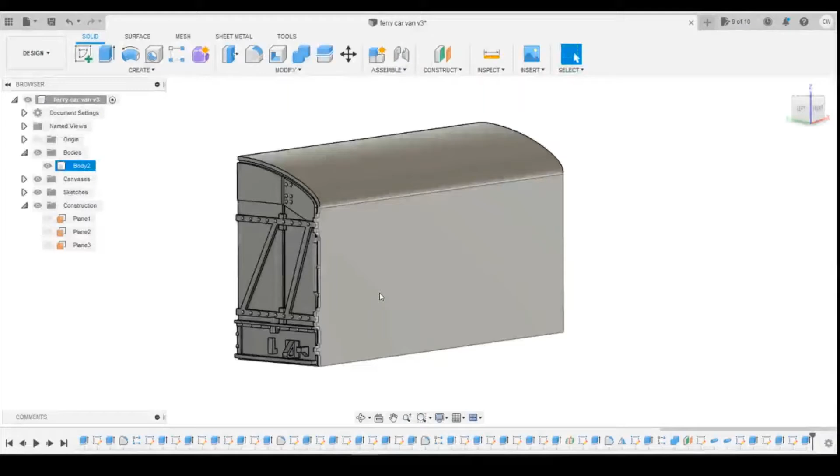Okay, so the first thing we're going to look at is if we get the canvas back onto the side, and we're going to continue the hinge round the corner here, so you can see it's all in line, comes around here, top and bottom. Doesn't really look like there's any rivets on these. I'll try and see if I've got any pictures that are more close up. Yeah, it doesn't look like there's any rivets or anything, they're potentially just welded on. Well, it's just like a strap, so it should be nice and easy here.

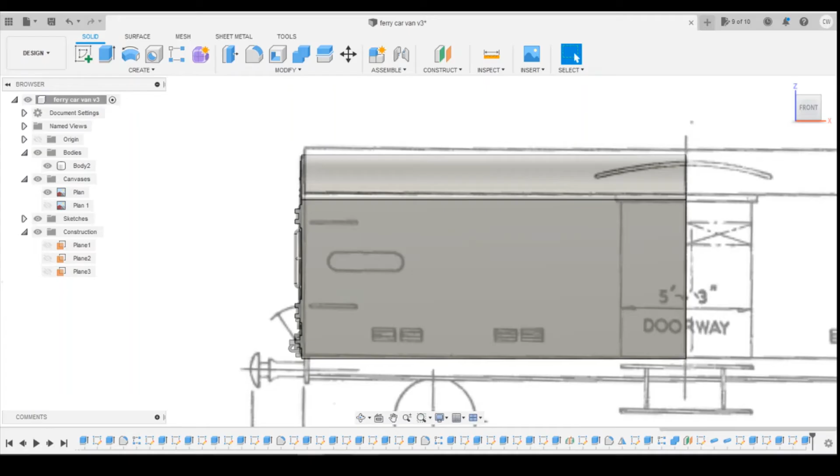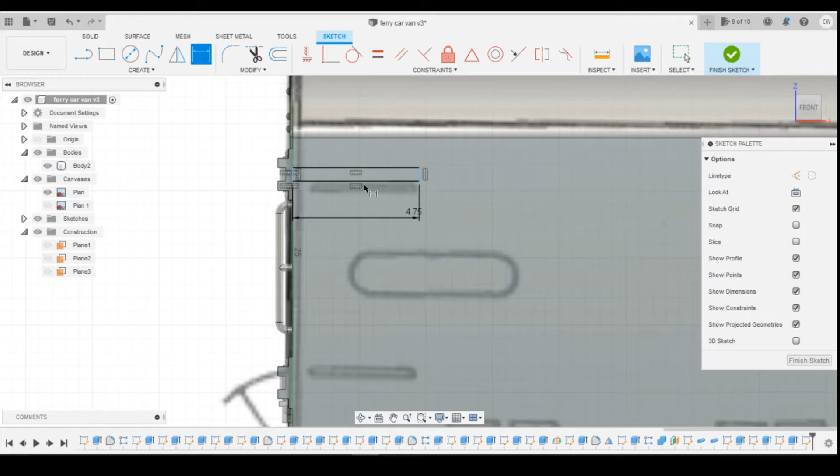So create a rectangle, I'm going to do it on the side face here, and it comes from the end of the wagon, so just doing a rectangle, find it in line with the base there, and I'm just going to drag it across like that. Okay, dimension wise it's going to be 0. Actually, if I don't dimension that, if I delete that, we use the constraint, so we'll use horizontally vertically constrain that to the same point in the hinge and the same on that one there. Lengthwise, I'll go for 4.75, it sort of matches the drawing a little bit, and horizontally constrain that corner to that edge there.

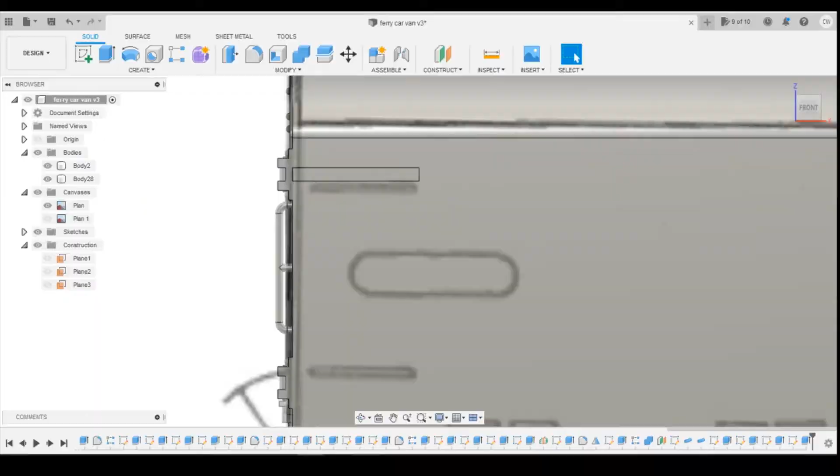Okay, so now we'll just extrude this forward slightly. I don't think it needs much, maybe 0.15, it's just giving a bit of relief and profile there. And looking at the pictures, it's quite close and fitted towards the body, so I don't need to come up particularly far. Okay, let's mirror that feature downwards. So select the feature, and the direction comes down. So it's going to be 7.75, which is what we were doing earlier for all the rest of them, and then we need 2 of them. Okay, so that's completed.

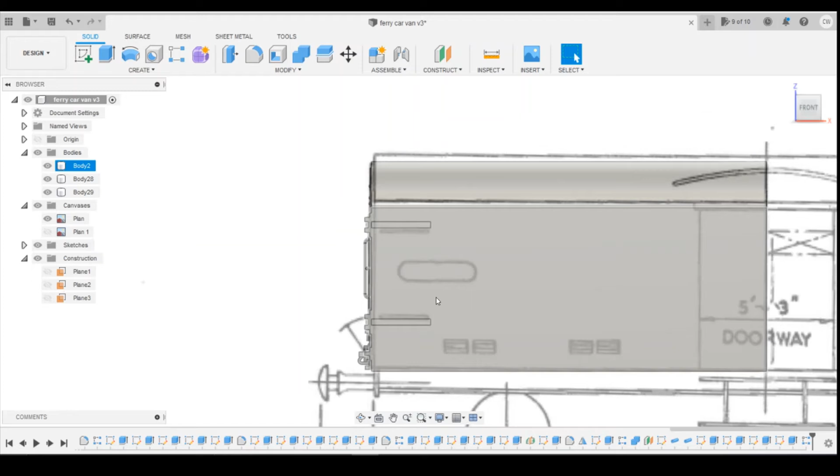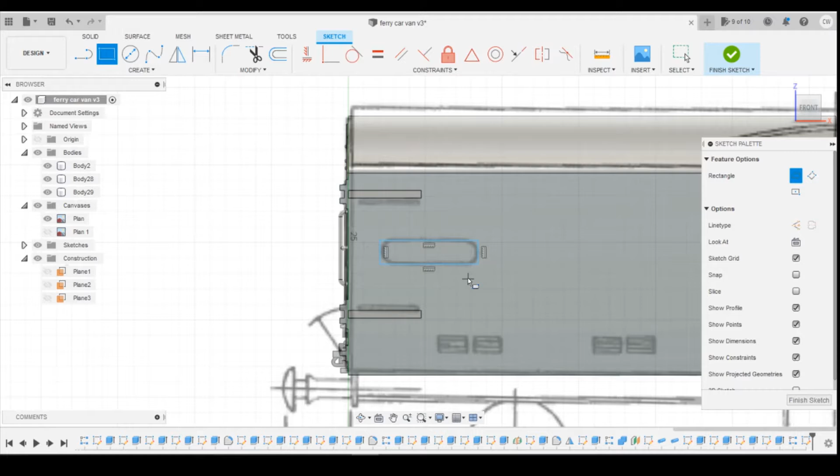Okay, so the next thing we'll draw is the chalkboard here on the side. Again, coming to Fusion, you can see that its position is actually on the plan. It actually looks pretty close to where it should be, so I'm going to go with what's here. So we'll create a sketch on the side profile here, just using a rectangle. Drag out to the correct size. Height-wise, let's dimension that. Actually, let's go dimension between the 2 sides. So we'll go for 1.5 millimeters.

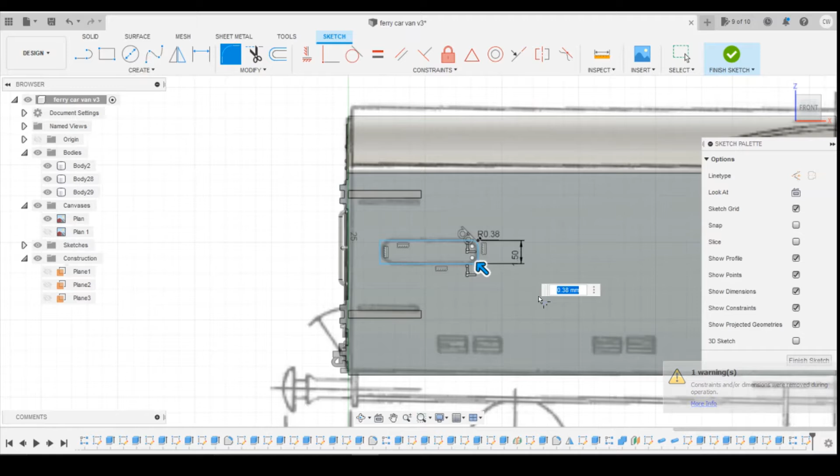And looking at the picture, some of them are rounded off, some of them look like they've just had the corners cut off. I think I'm just going to go rounded because I think it looks neater, and obviously once you print it, it's not going to be particularly big anyhow. So that should be 0.75, I think. We'll round that completely. Yep. And we'll do the same on offset. We'll do the fillet on the other corners here. And 0.75. Let's round it up.

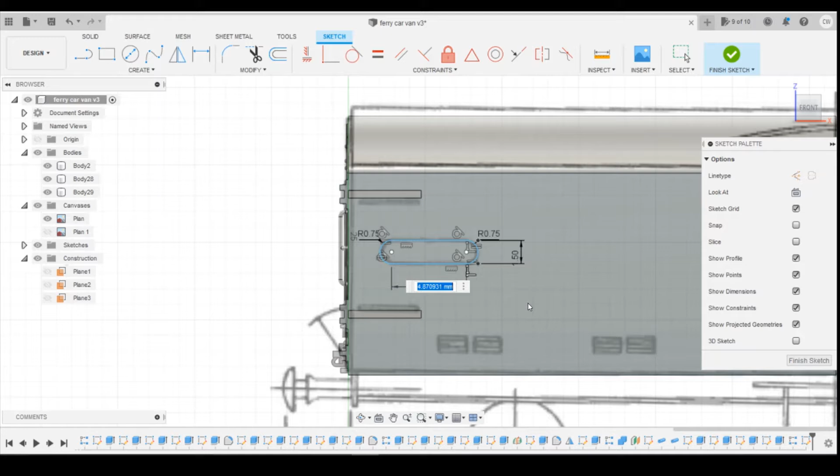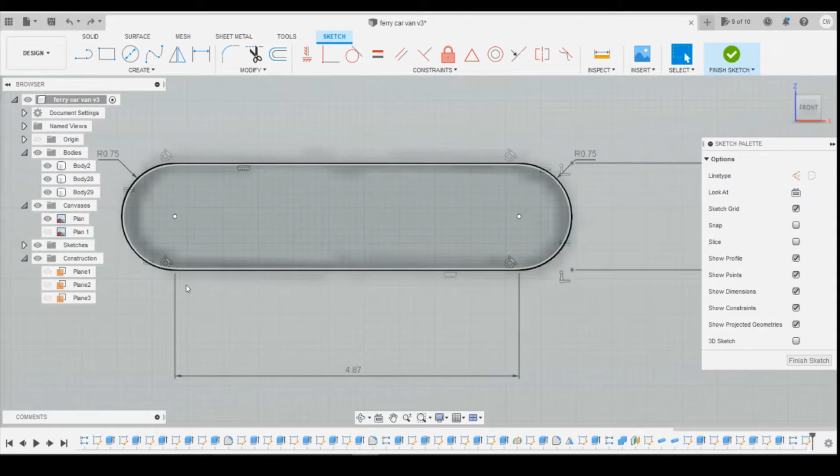Let's dimension the length. 4.9. It's getting a little skew there for some reason. Undo that. Undo that dimension. Yeah, for some reason that's skewed up the corner. So we'll just go with whatever its length is when you define it. It seems to still be circular enough for me. Let's dimension the height. 1.5 millimeters there. And the distance from the end, 2.1.

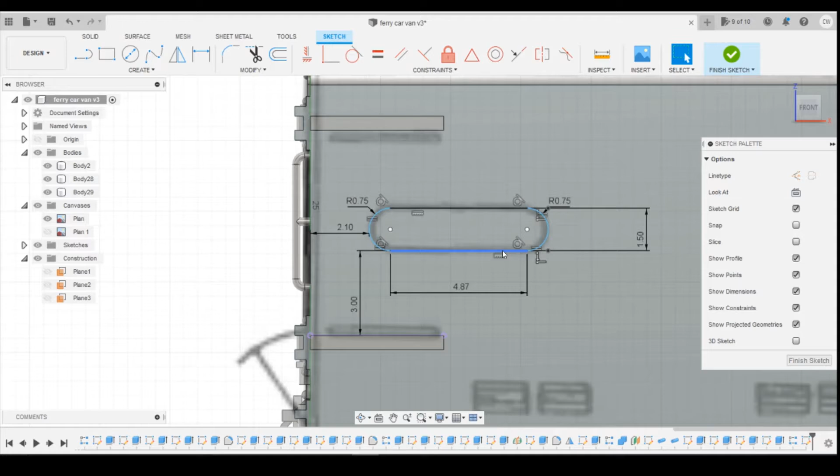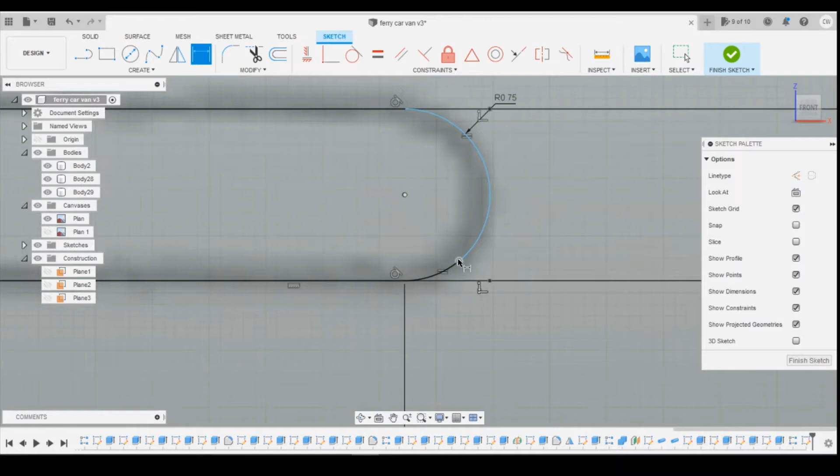Okay, let's take that dimension off there and dimension between the 2 sides there. Not sure why that radius isn't dimensioned, because it should be. There. Yeah, okay. There. Yeah, I don't know why these aren't dimensioning. There's a little step on it for some reason. Okay, not to worry. What we'll do is we'll leave it as it is.

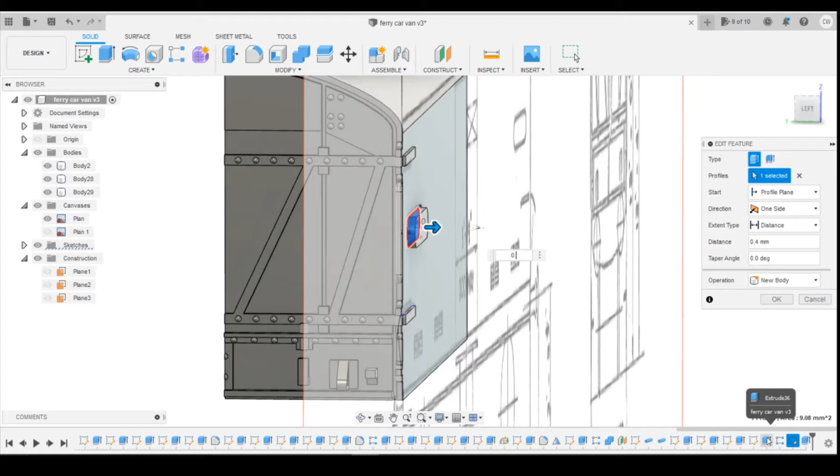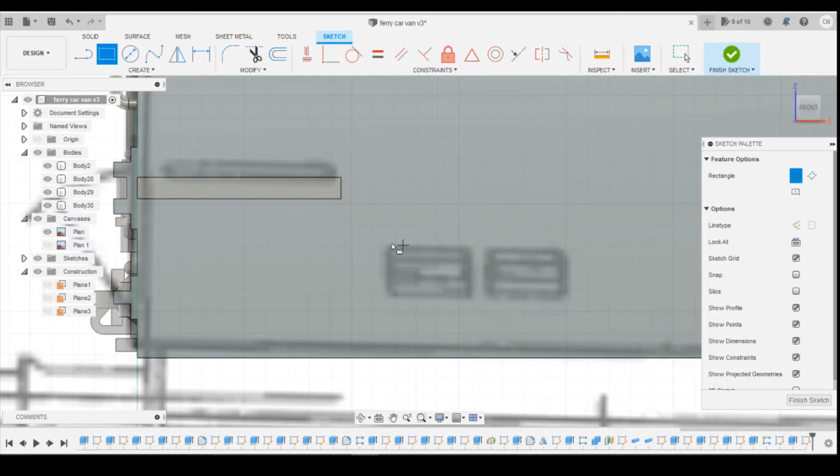Okay, so the next one I'm going to add in are these little vents on the side here. I'm just going to do representations of them really. Creating a sketch on the side. Just going to do small rectangles like that. Define the length. That's going to be 1.9. And the thickness of them, 0.2. Extrude that into the body, so that's minus 0.2, so it's going to cut in.

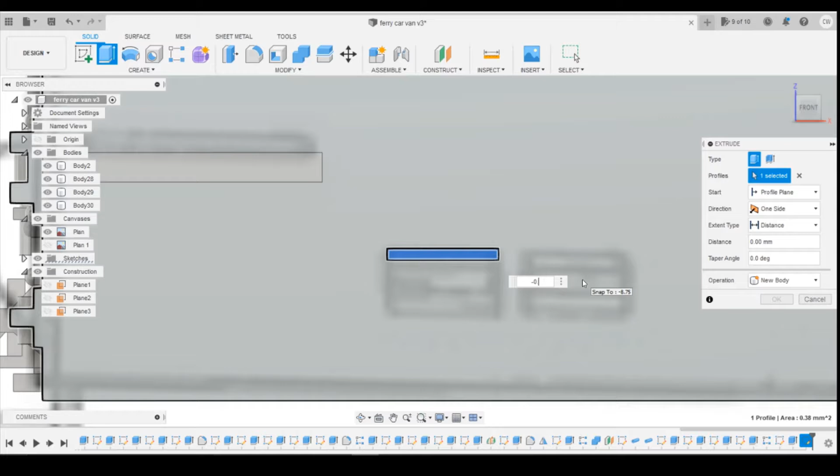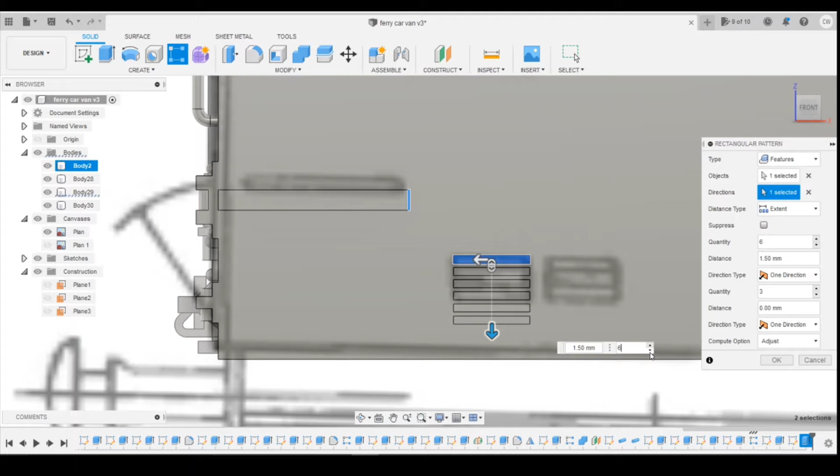So the vents, there's 1, 2, 3, 4, 5, 6 of them. Now we could try doing 6 of them, but I think that might be too many for it to spread out. Yeah, if you do 6 of them, it just fills the whole thing in. You could go maybe a little bit longer. Then you would get 6 in, but then they look massively too long. So I'm thinking maybe go for 4 and then spread them apart by 1 millimeter. Again, who's going to be counting these sort of things?

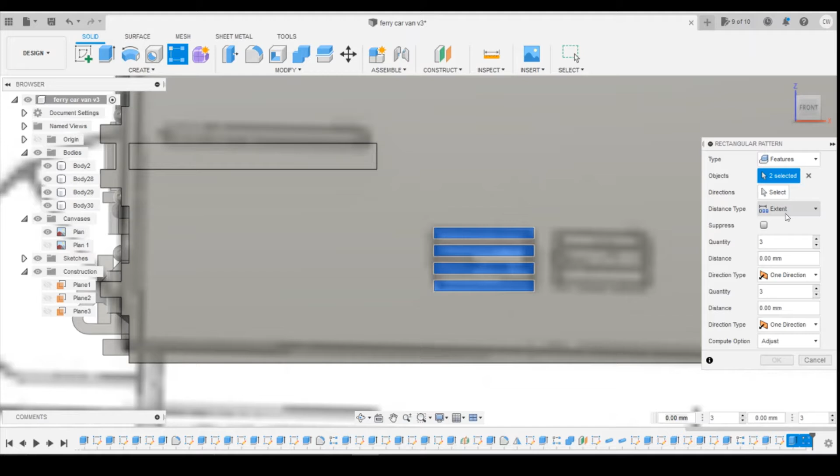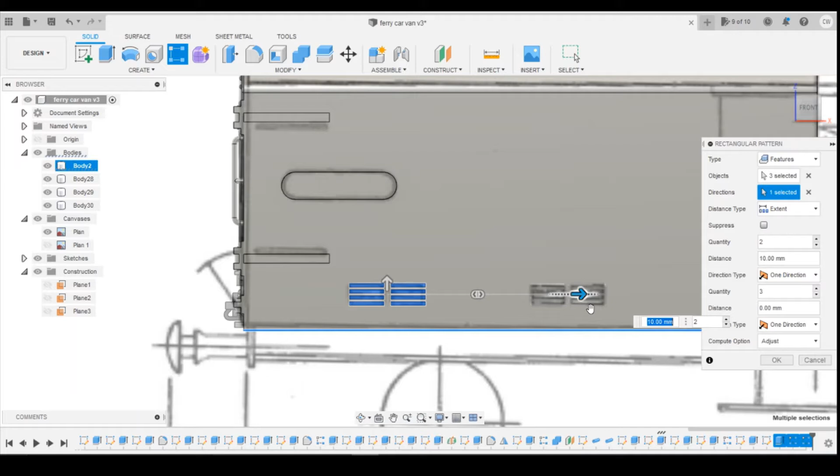So we're going to pattern these. So we'll pattern that feature and the pattern of them downwards, and then direction wise pattern across. Need 2 of them. Okay, we'll do that like that, and then we'll pattern all of that lot again, and direction across again. Need 2 of them. Try and get them as close lined up on these as possible. 10 millimeters come across okay.

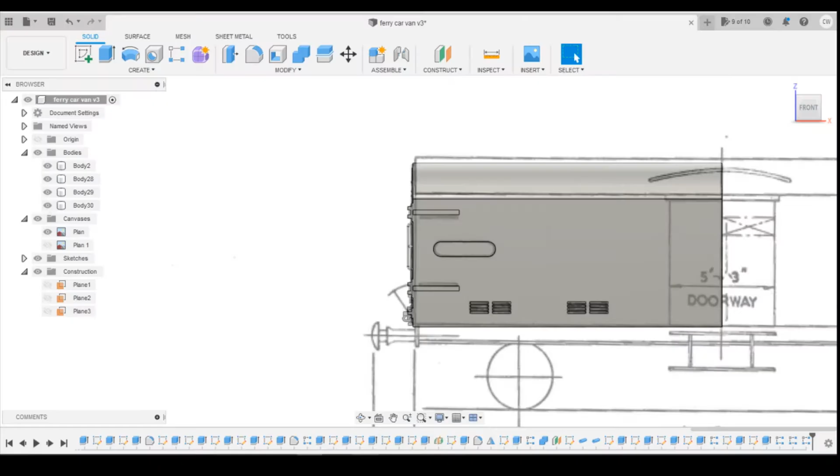Okay, the next thing I'm looking at is there's a strip coming along here, which looks like the roof just comes down. It's got like a panel in that's attached to the top. It's not a rain strip. It's just one over the doorway. So I'm going to add this onto the side here.

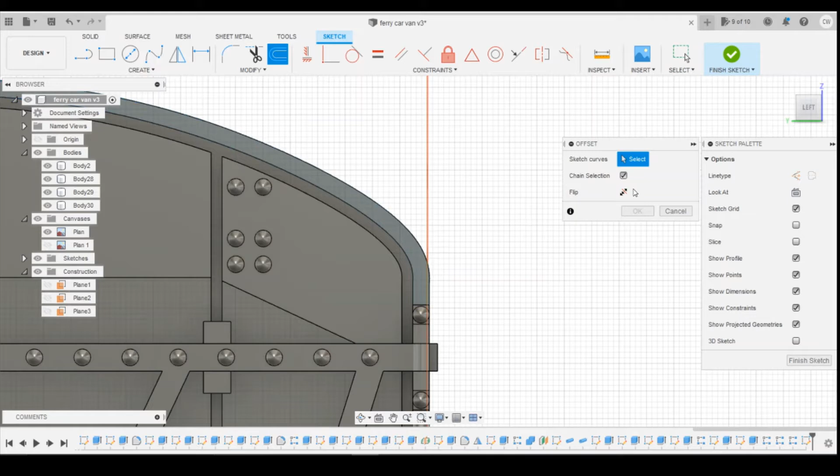If we create a sketch on the side profile, and we come down, so we should be able to just use offset, turn off chain selection, select the profile over the roof and down to the top of the hinge here, and bring that down to say 0.1, and then we can just close that in there and close that.

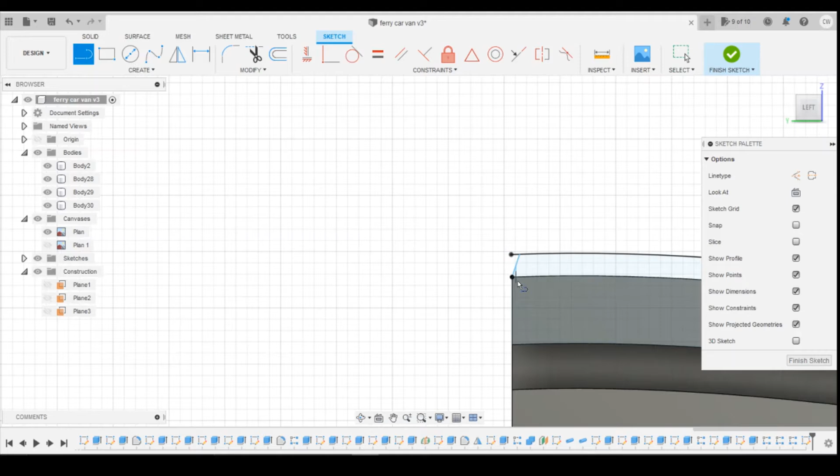We'll have to come up from the doorway here, put that down from the top, so go up. Okay, I'm going to snap that to an angle, and then we're going to do horizontal, vertical, constrain that, so that it's going up vertically rather than trying to snap to the end.

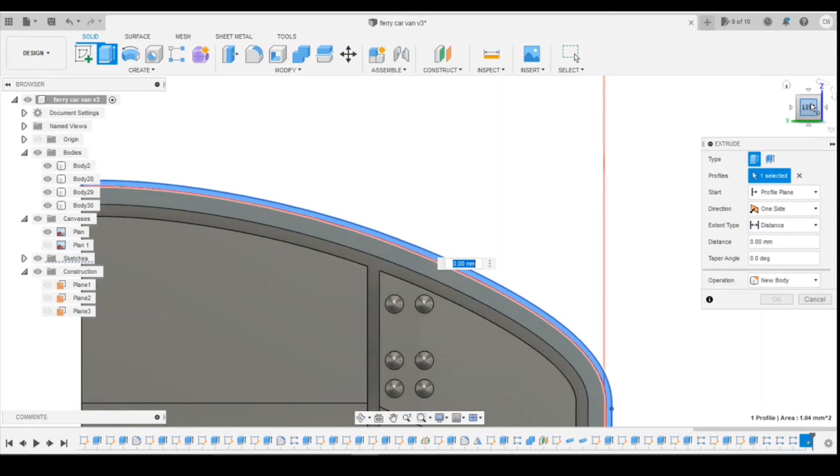Okay, I'm now going to select that profile that we just created and extrude that along the body to the other end of what we've just drawn. So to join. So that's given us that strip that goes along the top there. Just turn off, I get a better view of it.

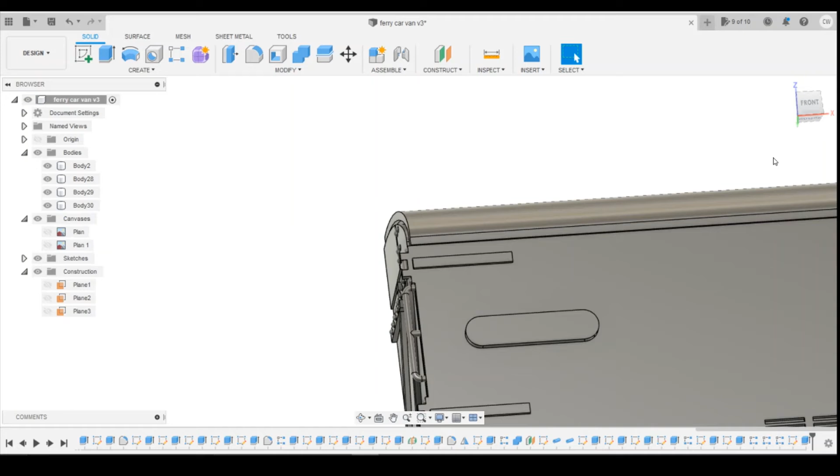Okay, don't worry about the extra line here, that's just where it's going from curved to straight here. It's not going to be different parts. Notice we've got extra bodies here, so we're going to get them all to join. Let's just come back in the history here, so edit that feature to join there. I'll come back and I'll fix that in a minute. Edit that feature to join there.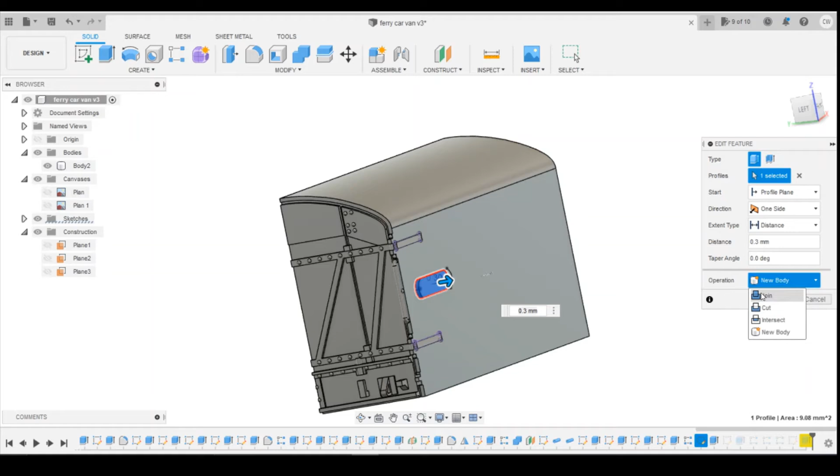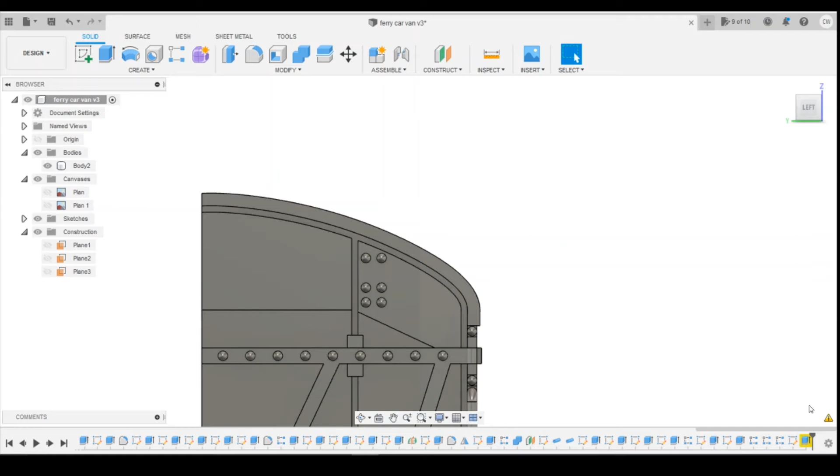Edit the profile sketch, that's fine. Sketch. What's the warning? The body reference is lost. Trying to feature reselect. Just select that profile again. Okay, and then join, and it gets rid of that warning. That's fine.

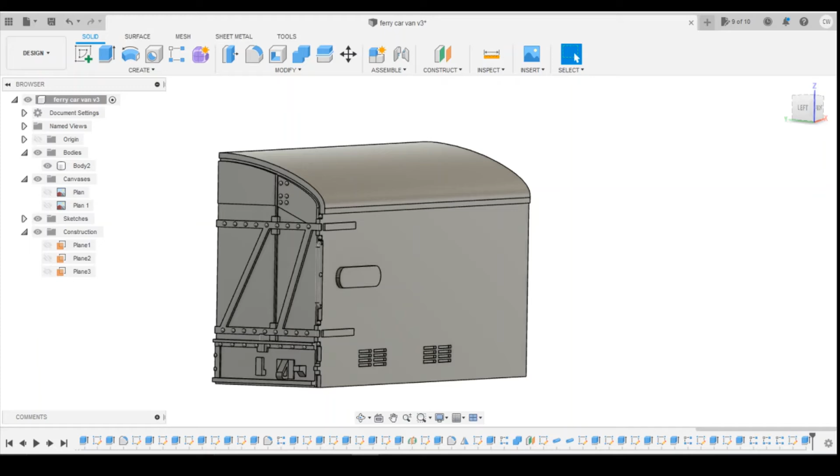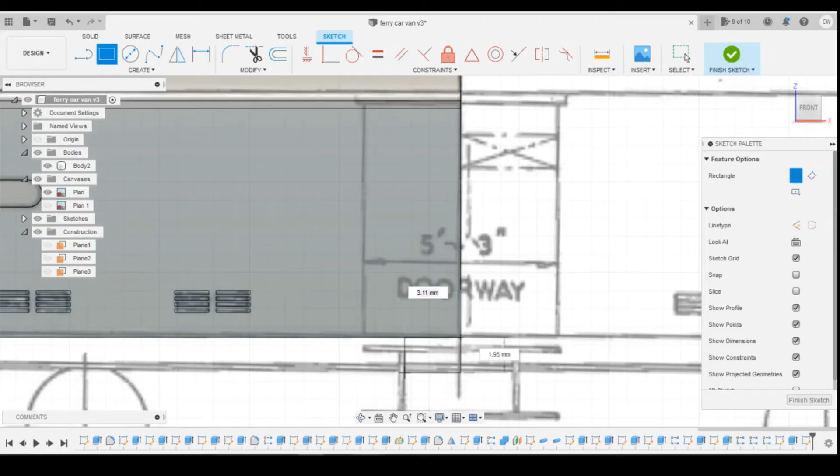Okay, so the next thing I'm going to draw on is the doorway. So again we'll rotate to the front profile. We've only got to draw one of the doors. So let's create a sketch. I'm going to do a rectangle from the bottom corner up to, does it go all the way to the roof? Yes, it does. Go all the way up to the roof, like that. I'm just going to do a thickness here. I want the whole strip to be 0.25, so I'm going to do that as 0.125.

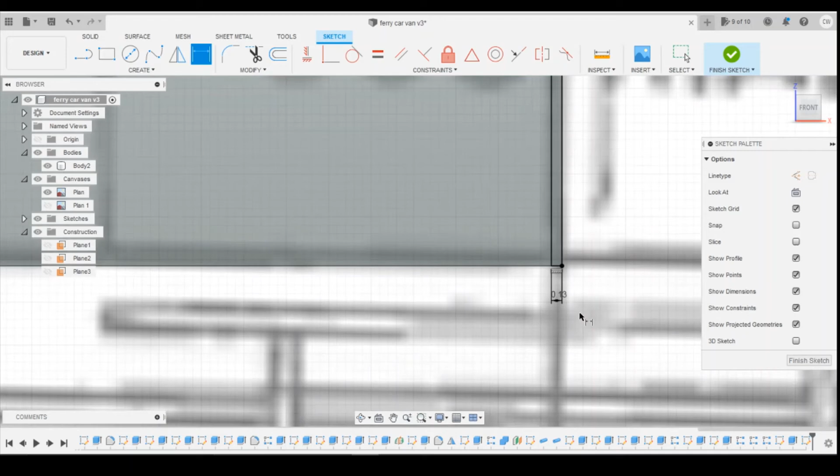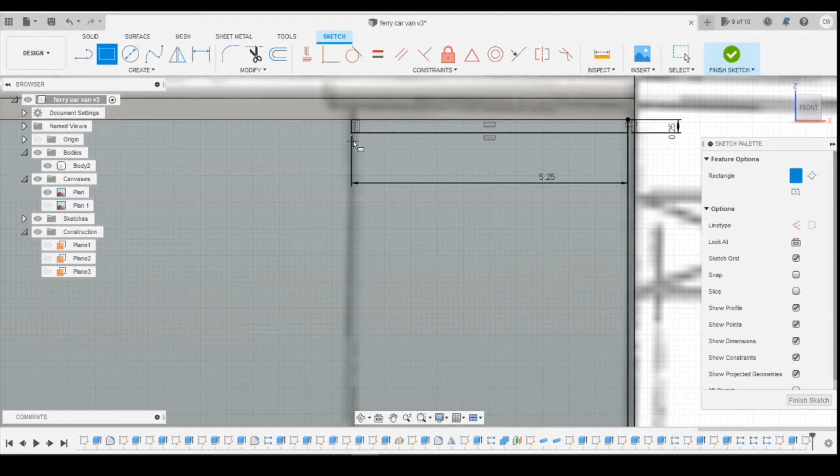One that comes across to there. Let's create a length 5.25, thickness 0.25, and then we'll create another one that comes down. Again, we're creating a thickness there 0.25, and I don't think there's one seam that goes across the bottom that we need, no, because the door goes all the way to the floor.

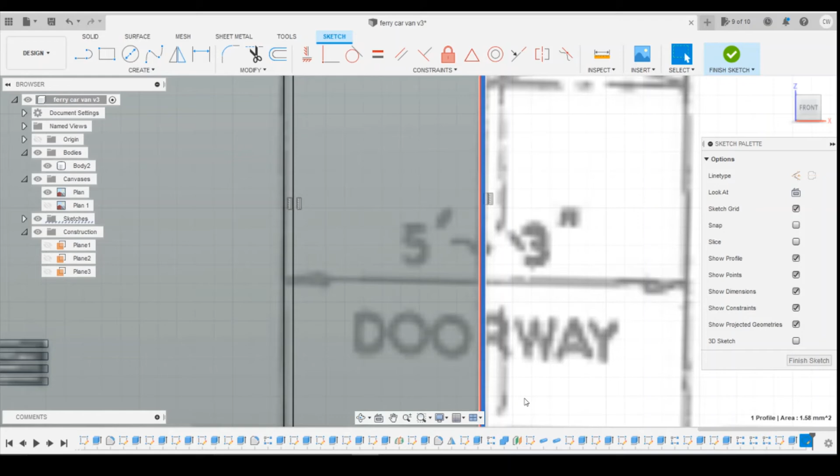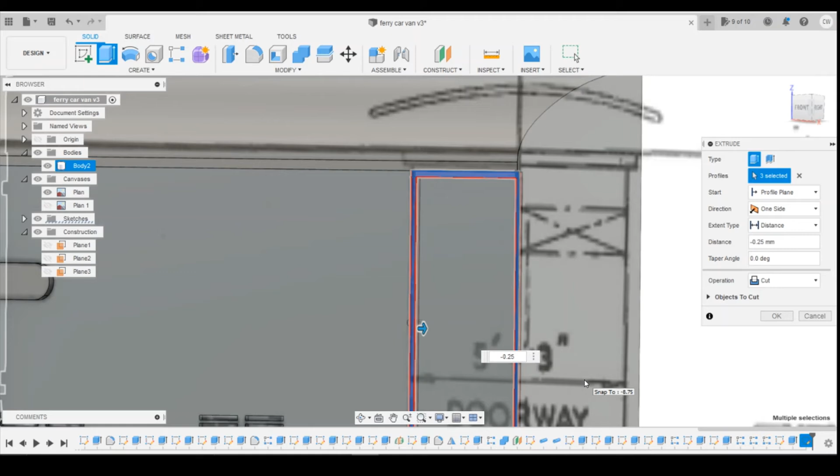So I'm just going to select these three profiles, and then I'm going to extrude them into the body. I think maybe 0.25 again, extrusion depth minus 0.25, make sure it's cutting. That's going to give it a deep enough channel that you'll be able to tell the door's there. Okay, so now we've got doors.

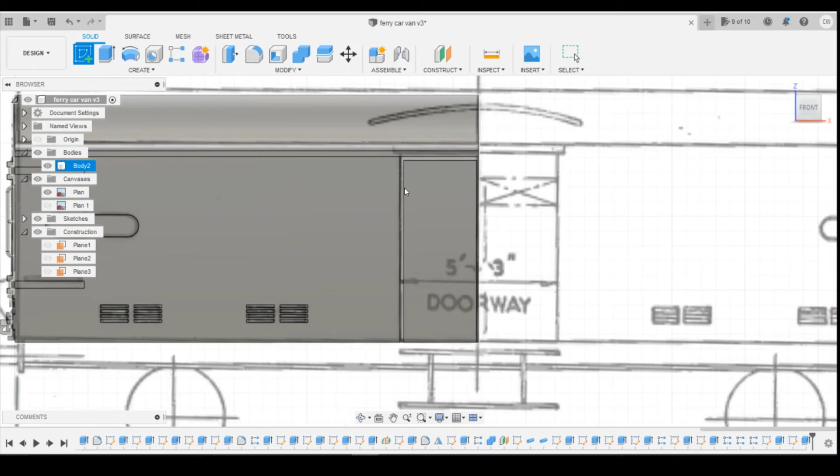Let's look at doing the door hinges. Okay, so see if we've got a close-up picture, but we haven't really got a great picture of the door hinges, if I'm honest. But they don't look like they're particularly big. I'm not going to go into too much detail on them, I don't think. I think I'll just create some sort of square that goes over them. Two profiles here. If we select the body profile, let's have a look at the height of them. So 6 inches down from the top, I think.

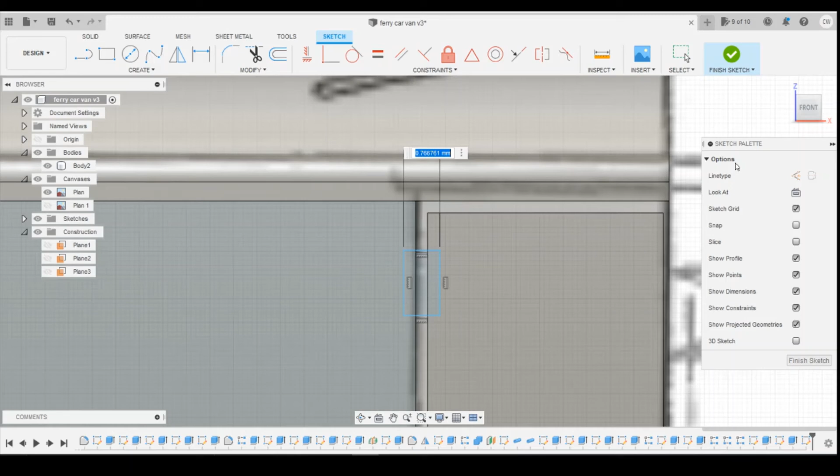So we're going to create a rectangle, we're going to bridge the door here. Okay, let's do dimension wise. So let's go 0.75, which means that from the side there should be 0.25, and then it'll be all the way across, will be fine. Dimension from the top down, so 1 millimeter, 6 inches is probably enough looking at the size of these. Yeah, and they're not even, unfortunately, so we can't just pattern 3 times down. So the second one is sort of halfway between the chalkboard and the hinge.

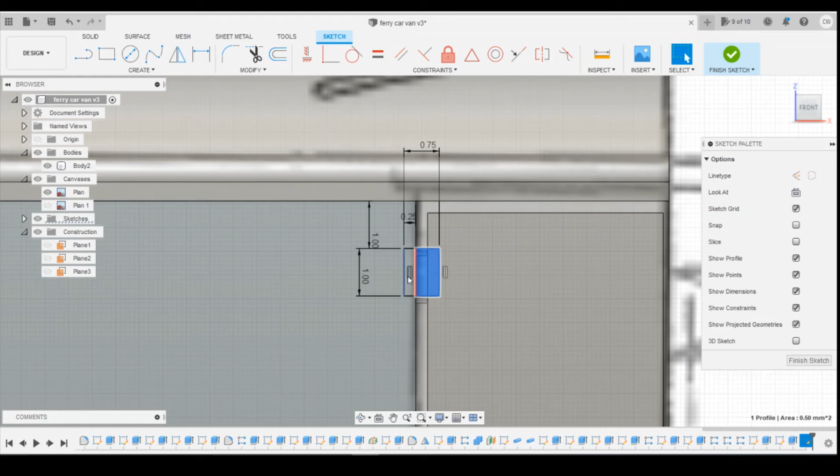Okay, let's extrude these. I'm going to do 2-sided extrusion. First one's going to go in, make sure it's a join. I'm just going in enough to the body to fill in the gap here. And I'm going to come out, let's go 0.25, give it a bit of profile.

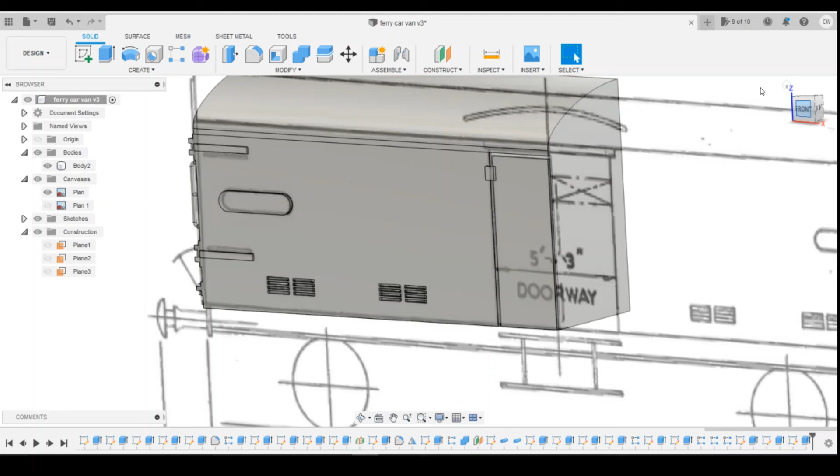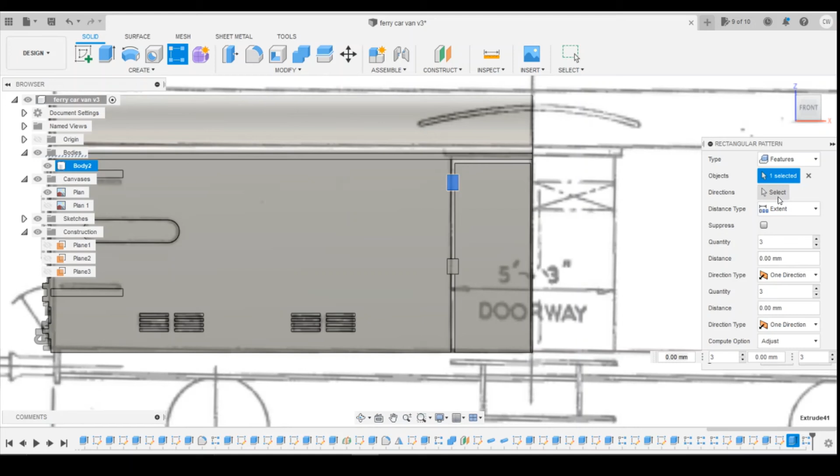Okay, and we'll copy that feature downwards. So we're going to want 2 to start with. We're going to come a little bit more than that. 5.5 on the first one. And then we'll do the same again, copy the feature down. 2 of them. We're going to go 9.25, I think. Puts this halfway on those vents. They're a little bit lower maybe. No, I'm going to go with that.

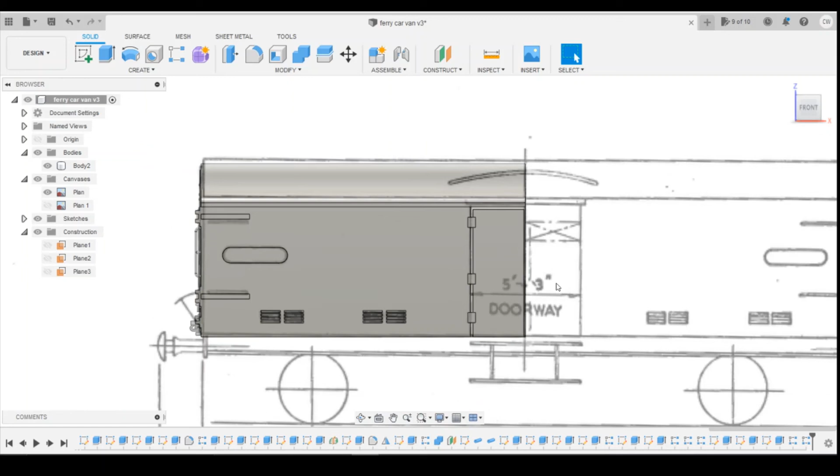Okay, so that's the door hinges. Again, they're not particularly detailed. It's in N gauge. If you want to go into 00, by all means, if you want to add a bit more detail, go for it. Interestingly, the door bumpers aren't symmetrical either, so we can't draw those at this point. You see this one's quite close to the edge of the door and this one's offset slightly.

So looking really, I don't think there's anything else symmetrical here that we can add in. Even the roof vents aren't symmetrical, so we can't do those yet either, which is a shame. So I think we're getting to the point where we're done with the body, I think, for the moment. Obviously there's details like the destination boxes here that we've got to add on. But I think the rest of the main details are complete above the underframe. So yeah, I'm going to leave this video at this point here.